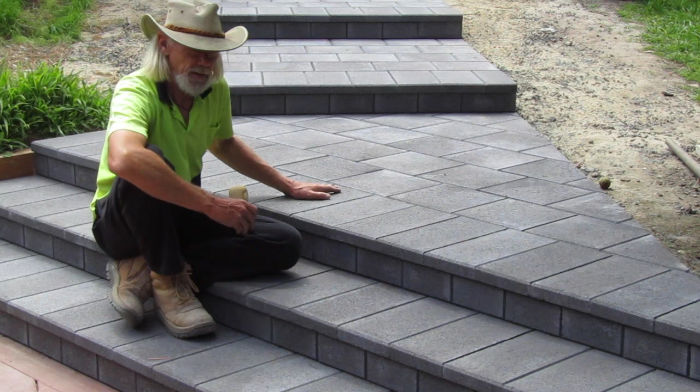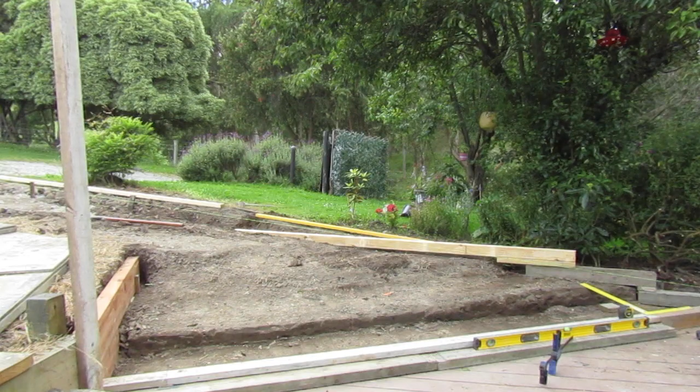In our next series, I'm going to take you through the process of our excavation, concrete foundation, and then cladding the staircase in these charcoal pavers. As the timber formwork establishes the step height, I'm able to accurately continue the excavation because it's going to set the depth of the concrete we'll be pouring later.

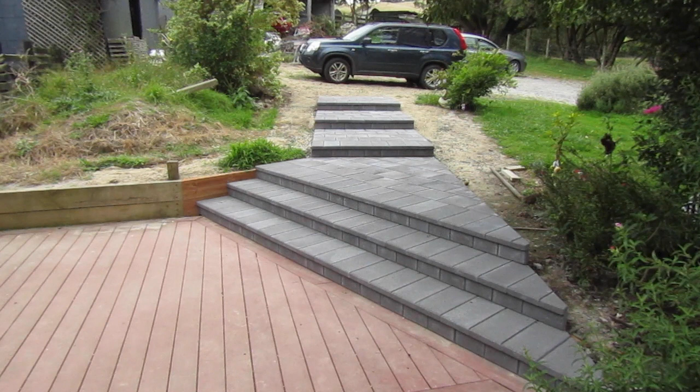You have it all. Our latest staircase project involved using charcoal pavers laid over a concrete foundation. The idea was to create access from the parking space up here where the car is down to this pre-existing deck area. The pre-existing deck already had a triangular cutout on this corner, and we had to make our staircase marry into this.

We also had some existing utilities in place. Gas and electric lines come underneath into this deck area, underneath the deck. So this triangular platform had to be at this height to allow the existing utilities to pass underneath it.

Yesterday I finished the very top platform, and today I was tidying everything up, removing my temporary pathway, adding some gravel around the edges. The customer wanted to plant a garden on either side of the path, so part of the design incorporated a 1500mm wide platform pathway that cascades down to this pre-existing deck. By balancing all those factors together, this is the design we came up with.

In our next series, I'm going to take you through the process of our excavation, concrete foundation, and then cladding the staircase in these charcoal pavers.

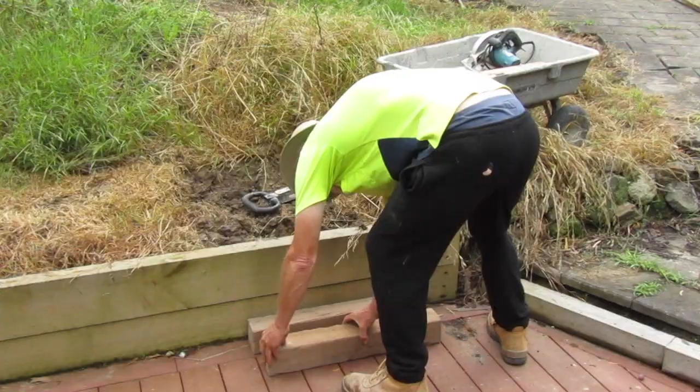Clearing a path through here to build a temporary access path and stairway. This allows the customer to be able to come and go safely, and also as I'm constructing this, I need to bring my concrete, gravel and materials in.

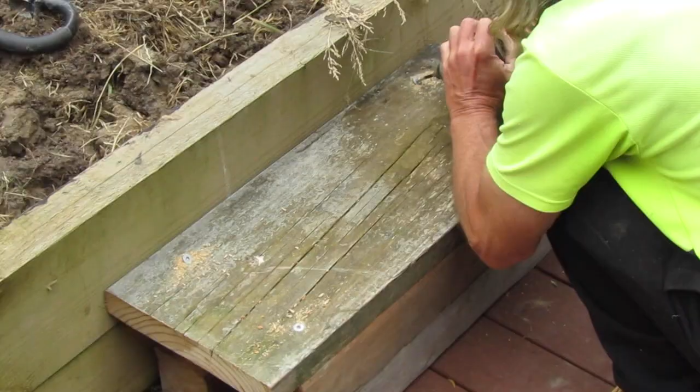To build our access path, I'll be using my preformed panels to create some stable flat areas for walking on and running my wheelbarrow down. Hopefully by the end of the day, I'm going to have a temporary pathway here and some of these pavers pulled up.

This pathway staircase is probably 30 years old and the timbers are all rotting out. It's been a combination of timber and pavers and bricks. So today's job is to build our pathway here.

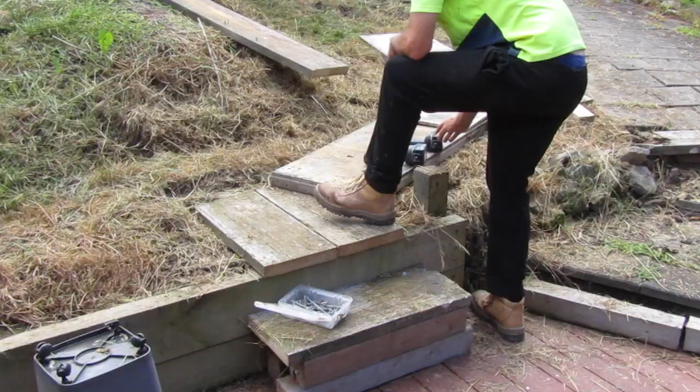That completes our access ramp. Now we're going to start on the demolition of all these pavers.

The old pathway comes apart quite easily. All the timbers are rotted and there's nothing really holding it to the ground.

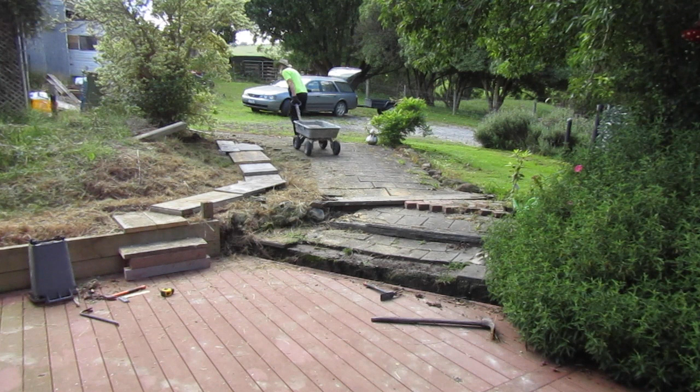My client wants to use new pavers for this new pathway. The old pavers are still quite useful, so I'm giving them a rough clean up and stacking them off to the side for a future project.

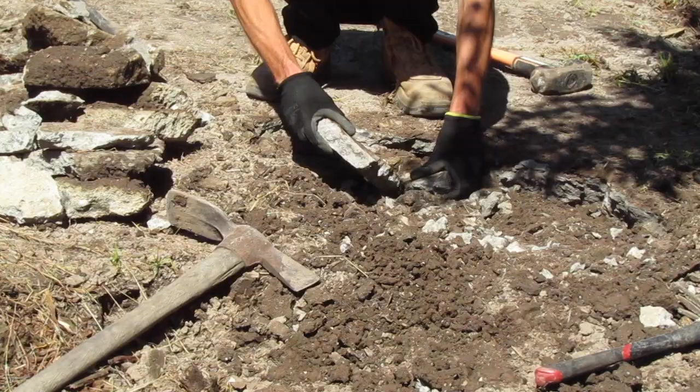After removing all the old pavers, I've run into some concrete.

That's enough for the first day excavation. We'll chip away at this concrete next week.

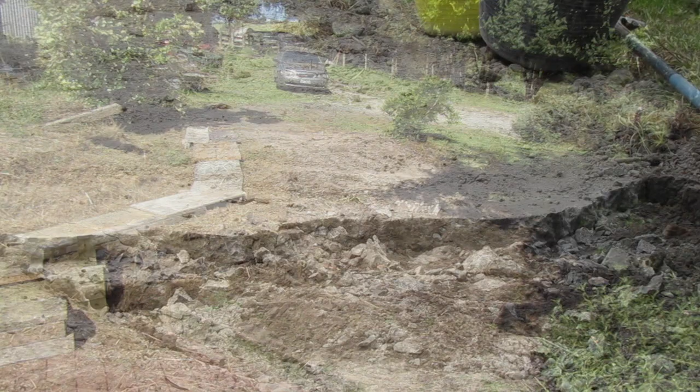The concrete I've run into doesn't have any reinforcement steel in it, so it's breaking up relatively easily. We've made a good start on demolishing the old pathway.

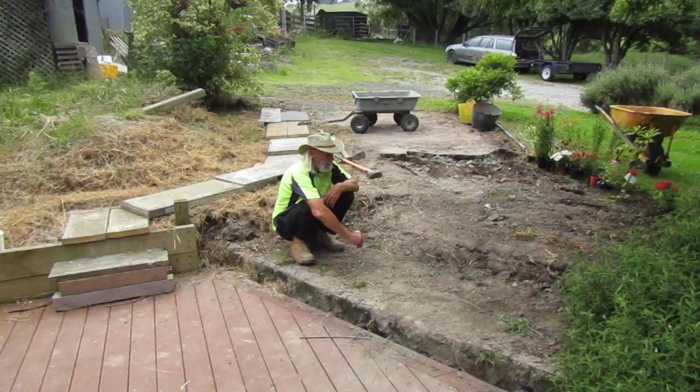My client had the weekend to think about the final design for this layout. At first she was thinking about putting a ramp in. She had some friends over on the weekend and they decided it was going to be too steep. So we're actually going to put a staircase, probably 5 to 7 steps, nice long broad steps, only 150 high.

Anyway, this design change doesn't really affect me that much except for what I'm going to build. So this is the time to change your mind before we start pouring concrete. Building the staircase or building the ramp is kind of the same thing as far as materials and excavation goes, but I will be excavating this slightly differently now that I know it's a staircase. The way we go about pouring the concrete and everything will be slightly different.

Today's project is to get this lump of old concrete out of our way. It's an old pathway that was laying under the pavers. Luckily there's no steel mesh in it, so it's coming apart pretty easy.

Once I've got all this concrete out of the way, we'll get some timbers and levels out and come up with a plan of how the staircase is going to lay out.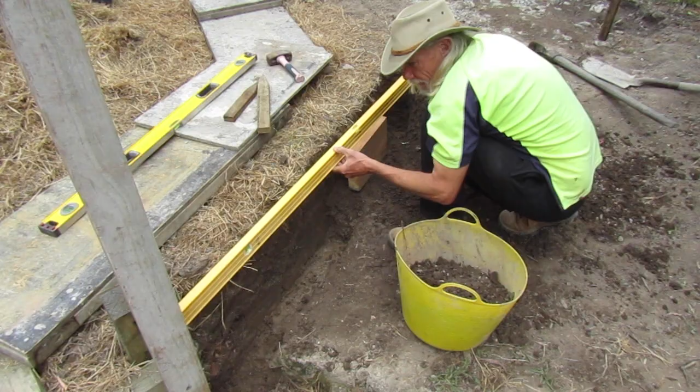I'll be building the extension of the treated timber retaining wall out of the same material that's already in place. My connection into the pre-existing retaining wall needs a 30-degree cut on the new material.

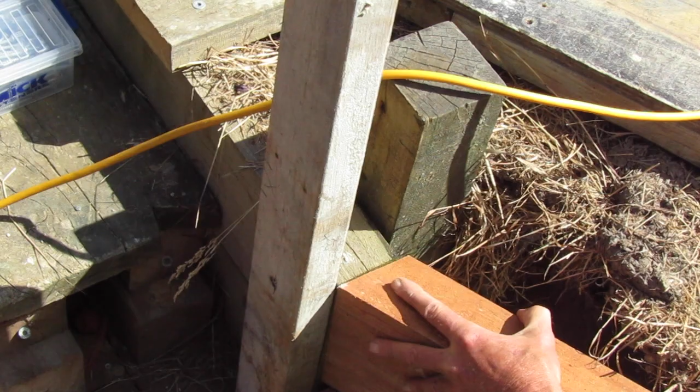Due to the size and dimension of this timber, I'm using a combination of my chop saw and a reciprocating saw to make this cut.

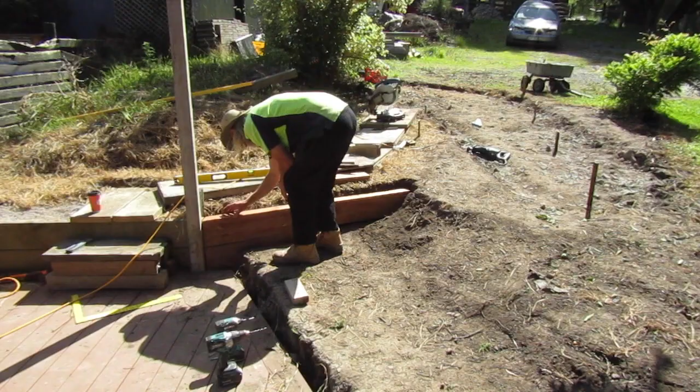I test fit the pieces in place and double check with my set square to make sure we're going to have the 90-degree angle for the stairs. It's easier to pre-assemble these two pieces of treated timber and insert them as one whole unit.

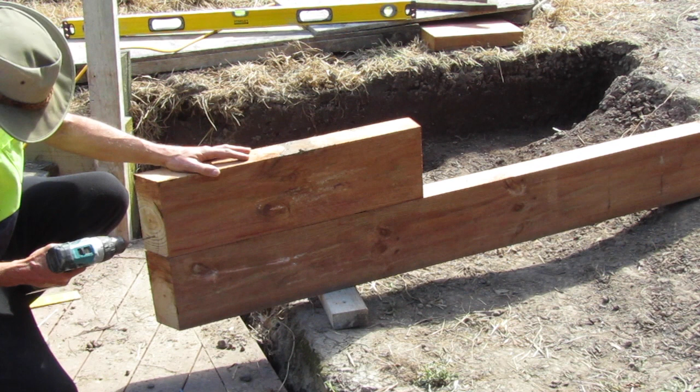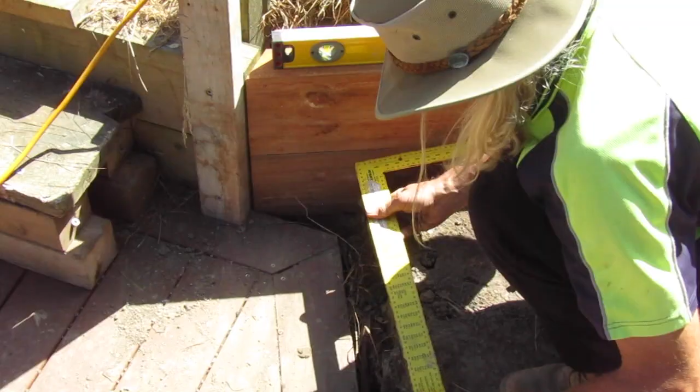With the new retaining wall fitting in place at the correct angle, I attach it to the old retaining wall and add some stakes to secure it in place.

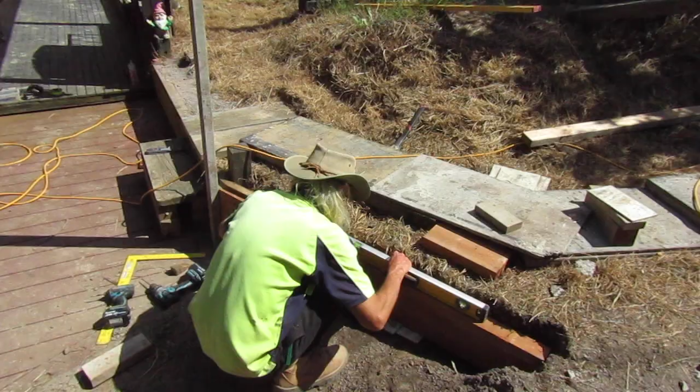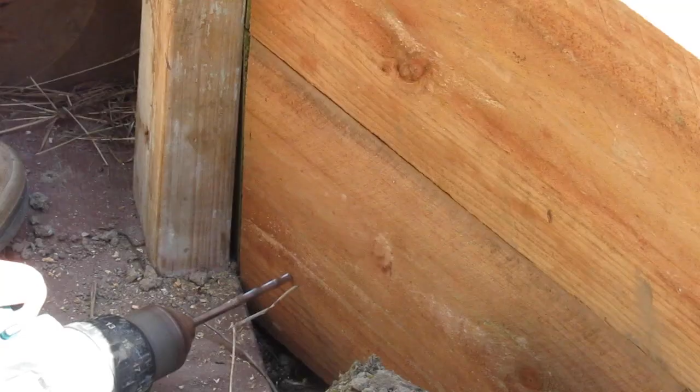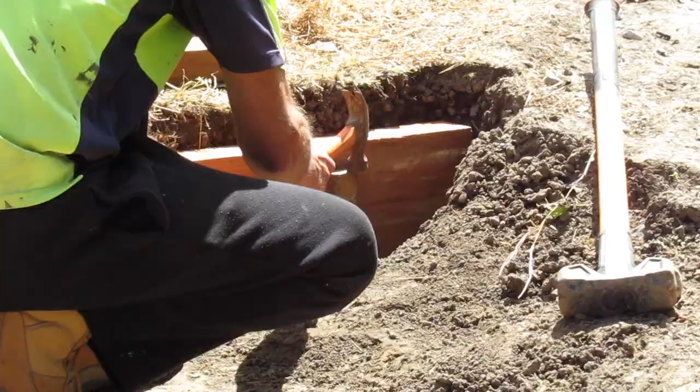With the timber retaining wall in place, I can start the excavation of what'll be the first step from the deck on our stairway. To pour concrete in a structure like this, I'm using the dirt as part of the formwork to shape my concrete.

So the dirt has to be excavated carefully and specifically. This way I'll end up with the correct thickness of concrete for our foundation.

I'm now ready to start constructing the formwork that'll shape the concrete slab. I start this process by installing heavy timbers along the edge of the deck to establish the height of the first step. This also helps establish the right-hand corner of our stairway, so I can start the construction of the formwork that define the steps that take us up the hill to the parking space.

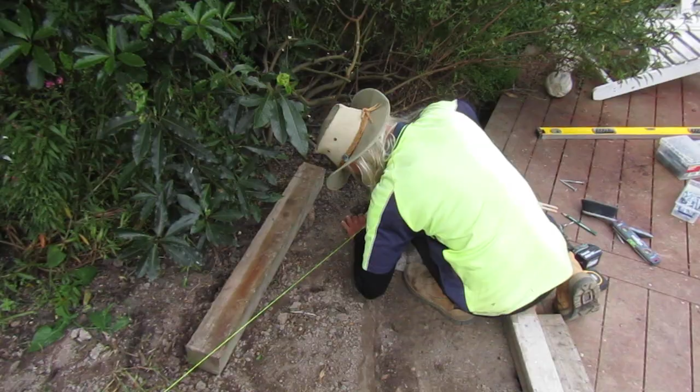My client had some old post material that'll work well for constructing the edge of the step formwork. I follow my string line to keep the steps straight and double check with my set square to make sure that we're getting the right height as we go up the hill.

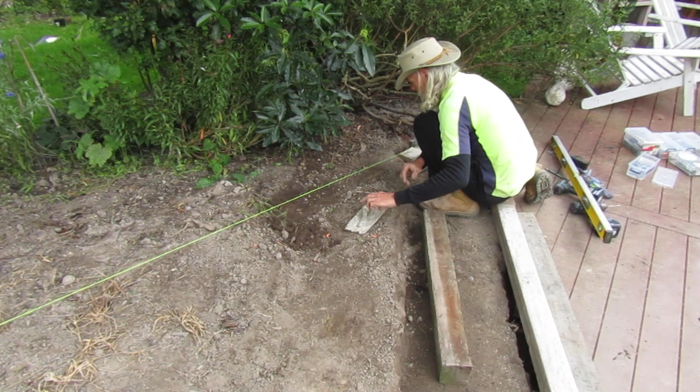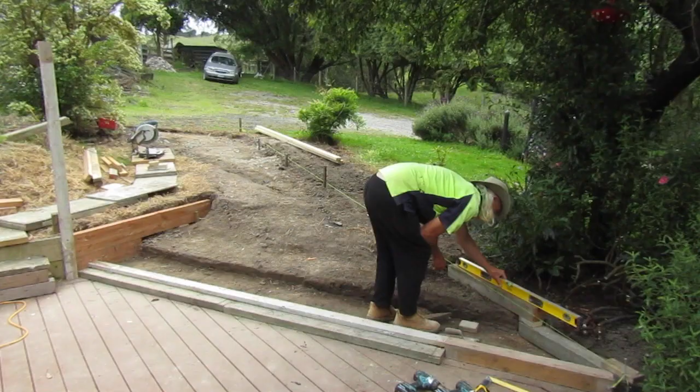I continue the process of establishing the height of each of our 6 steps as I move up the hillside to the end of the stairway.

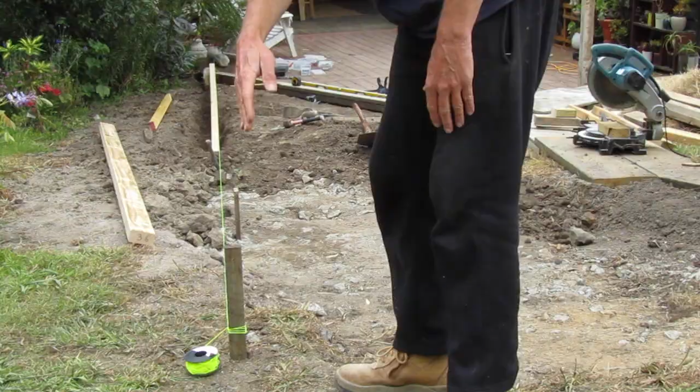As the timber formwork establishes the step height, I'm able to accurately continue the excavation for the concrete foundation. As I mentioned earlier, I want to be very accurate with how I excavate this soil, because it's going to set the depth of the concrete we'll be pouring later.

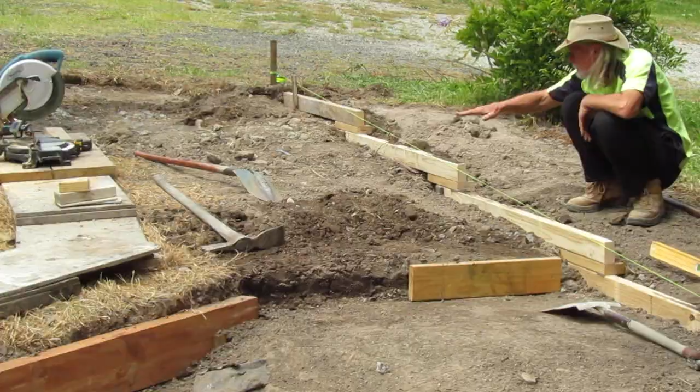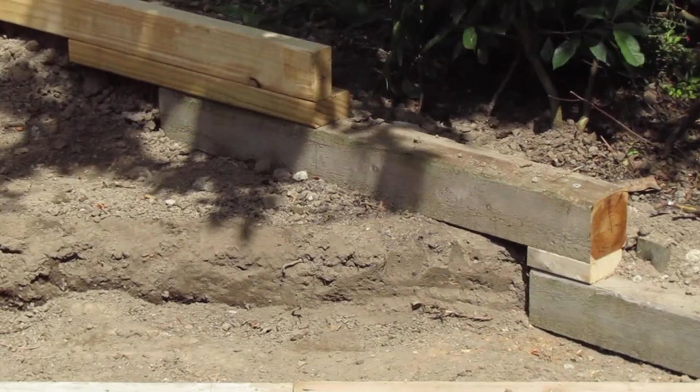Join me on the next episode as we finish the timber formwork and get the concrete poured for the first 3 steps.